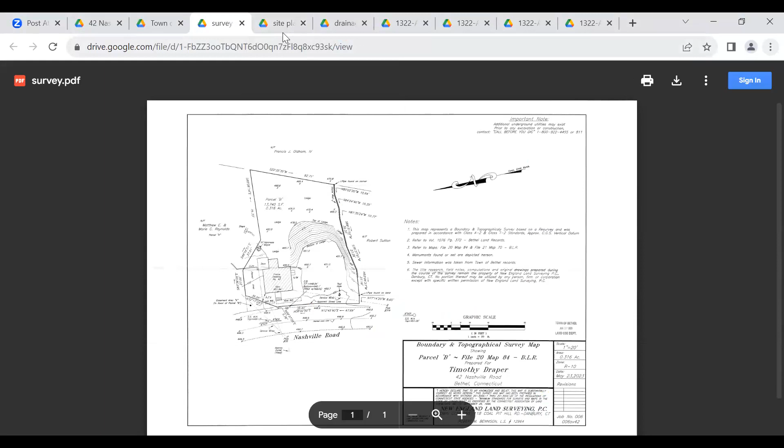Thank you, Ken. Because of the small scale of the site, the plan scale is 1 inch equals 10 feet. So if you look at the plan, you'll see a garage space, the garage itself is a 9x18 space, which is your standard parking space. So you can probably visualize one space outside the garage and then the distance to the edge of Nashville Road.

Okay, so I'm up here at the board. If this is 9x18, which is a standard parking space, the distance to the traveled portion of the road, the apparent street line, is... Oh, Neil, I can help you with that if you like.

Okay, Todd, you got a better scale? I scale it up. Yeah, I think the closest, so on the north end, the closest space would be 15 feet to the rear of the space from the edge of roadway. Yeah, so there is additional space behind the parking space that's behind the garage. Nancy, does that answer your question?

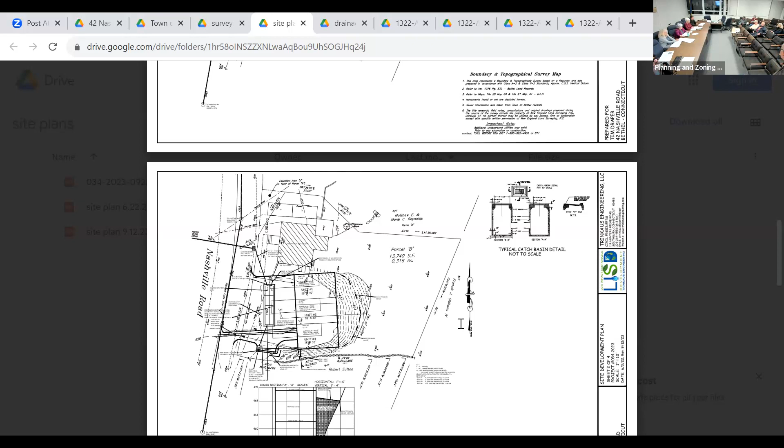Yeah, I just can't visualize it when I drive past it. It looks like a cavity in a tooth. Yeah, that's what it looks like.

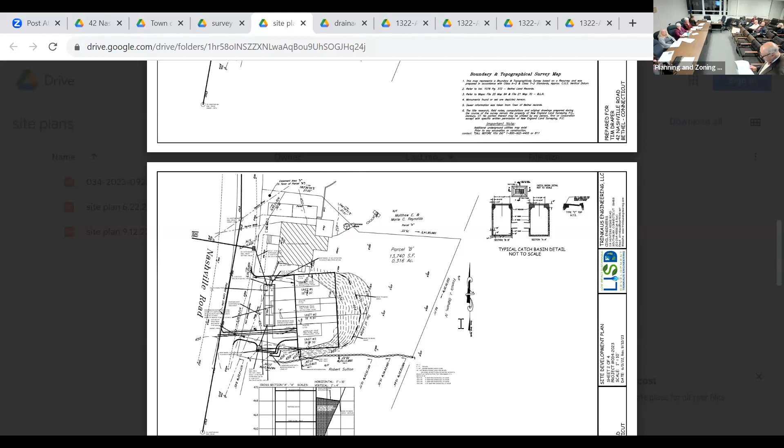Okay, thank you, Todd, I appreciate your help. But if I may just say one thing, I think the perception is off right now because the building's actually going to be pushed further back than you may be expecting it to be based on how you visualize it out there right now. I think the perception is that it's going to be closer to the road than it's actually going to be, because some more ledge will need to be removed for the actual footprint of where the building is proposed.

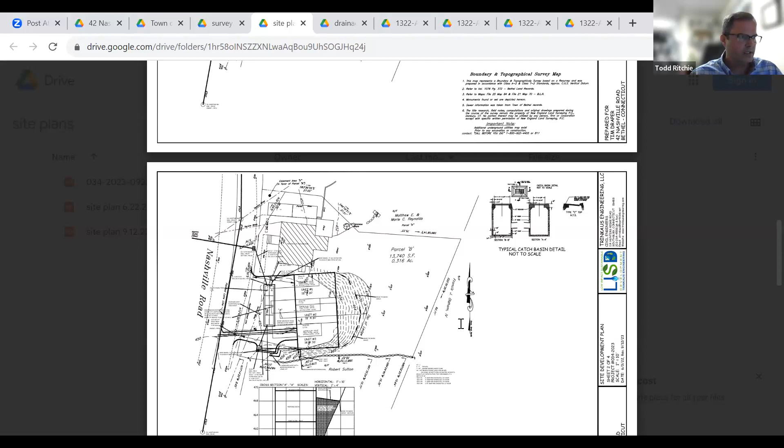So it's actually going to be, I don't have the total distance, I guess it's 15 plus the 18, the total distance from the closest point from the edge of pavement to the building. And Todd, I'm going to suggest that, following up your cue, the new construction—

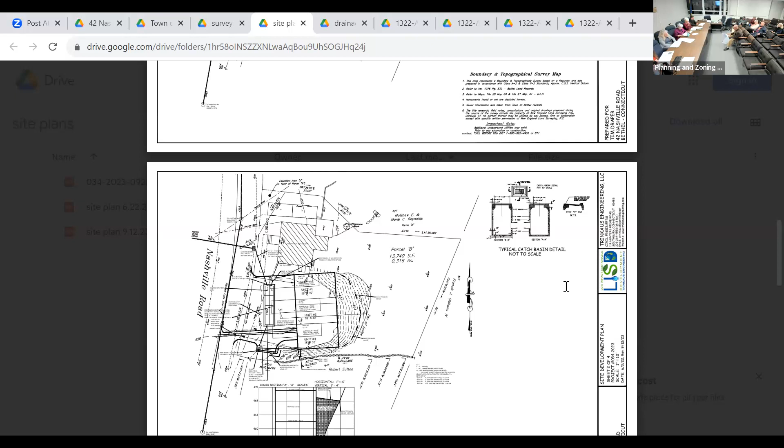The 3 units are set back from the existing house by about 10 feet. So if anybody wants to get an idea of where the new construction would be, you have to go to the existing house and pace off an area that's 10 feet back. That's where the front wall of the 3-unit building will be, and that's where the parking stall starts. You have, as I say, almost a good 25 feet from the road at that point. So there should be more than adequate.

Where it was marked, the red spots that were marked - they went out and painted two spots. One spot, which we were told is where the front of the building was. Front is the corner, right in front of the Bilco door. This drawing does not show that. This is where the red spot is. That is where the building is. There's a difference there.

The red spot is in the middle of the Bilco door. So I guess the most important thing is, Mr. Trinkaus, could you tell us how much further is this building, how much more rock is going to be removed? How many more feet is going to be removed in order to put this building where you want it? I would have to look at the plan and then I could provide the number to staff. I don't know offhand.

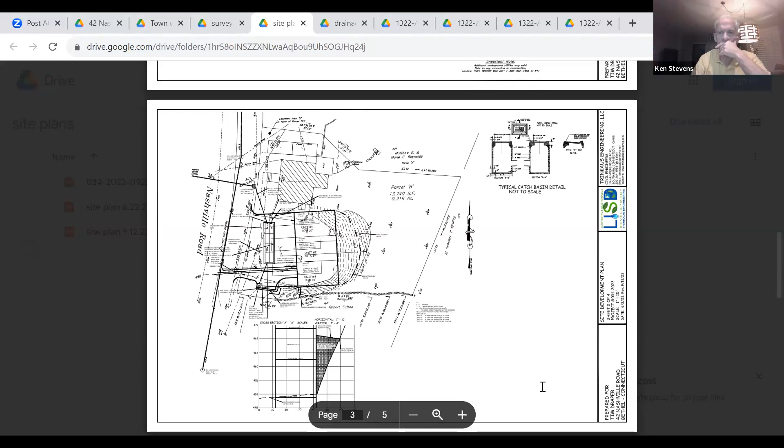Brad came back online. For the second round, we can do that. All right, never mind, fine. Mr. Coates, can you be heard now? I'm not sure, can you hear me? Yes, we can hear you now.

Name and address, please. Brad Coates, 1 Fairchild Drive. My question was: is there going to be an additional opportunity for public input after the discussion of this application at this meeting?

During the public hearing, when the public hearing is tabled or closed, whichever happens, then it'll be over for tonight. I did have some comments, but they're not germane to this particular application, so I guess I'll join you at your next meeting with those. So you have no questions about this Nashville Road project? Only I did have a question about whether the commission will be voting on this tonight, given all of the recusals.

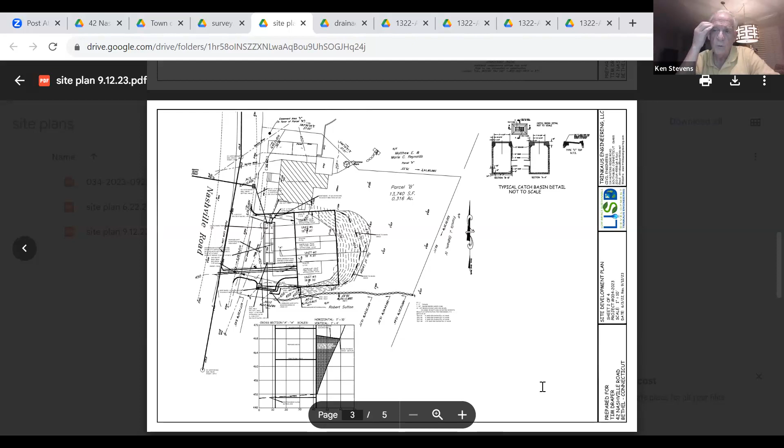Mr. Trinkaus, are you saying the building's foundation will be the retaining wall, or will there be a retaining wall between the house and the cliff? The back wall of the building will be the retaining wall. It'll be a concrete wall.

Is that just the basement garage area that'll be abutting? It'll extend up through the first floor for part of the floor area, and then what would be the third floor, since the garage is on grade, then first floor, second floor. The second floor will be walkable to the outside grade behind the building. So yes, this wall will be up.

Anywhere around 14 to 16 feet, and then it will be backfilled. But it should be designed by a structural engineer, and yes, it will be. Okay, thank you, I couldn't picture it looking at the plan.

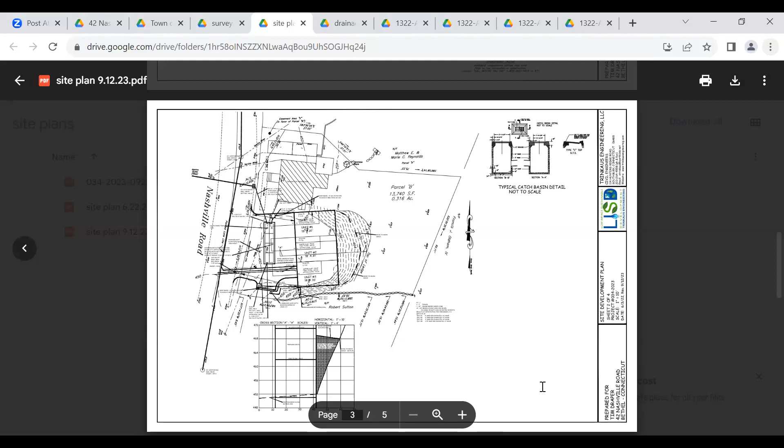Thank you for making that clear. It is 8 to 5 for excavation, and you can start at 7 for the hammering. We haven't had an excavation permit in a while, so that's why I didn't realize. Let's not even get into the semantics of it, it's very clear, the office knows the rules, and I'm just trying to give you an idea.

If someone's going to put up plywood, do electrical, bang nails, roofing, things like that, they follow the noise ordinance. If you have a piece of heavy equipment on the job, and you're hammering and removing rock or ledge, you have to follow the excavation rules. Do you agree with me? I do. All right, we're good on that issue.

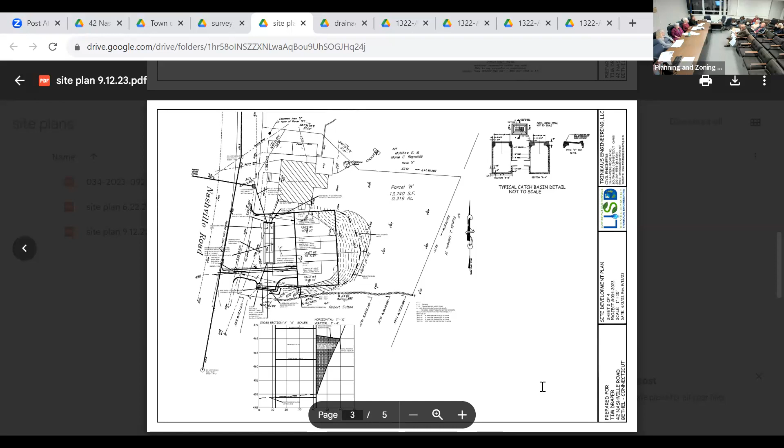About the fence where the property height differences are, in the corner next to the adjoining property owner. It doesn't have to be somebody trespassing that falls off there, it could be the owner himself walking to the edge of the property and tripping and falling off. So I think, from a safety standpoint, we ought to look at some sort of fencing there. It doesn't have to be large, but enough to show the separation of height differences.

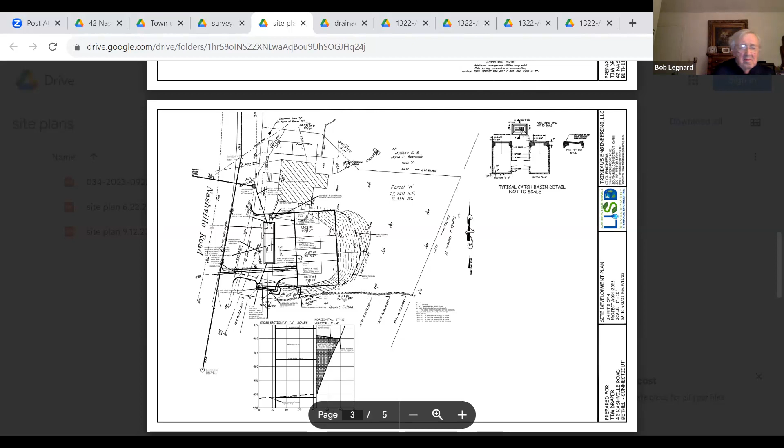Okay, Linda, did you recuse yourself? I don't.

So my question is, what is this going to look like? Because all I've seen is what's on these papers. We had that question last time. Yes, I asked it. And the answer is the building is the building that was constructed on Good Hill, he's told us.

I just- so actually, if you take a ride up there, the building will be slightly modified because it's a slightly different shape. But the material and the basic facade will reflect what's up on Good Hill.

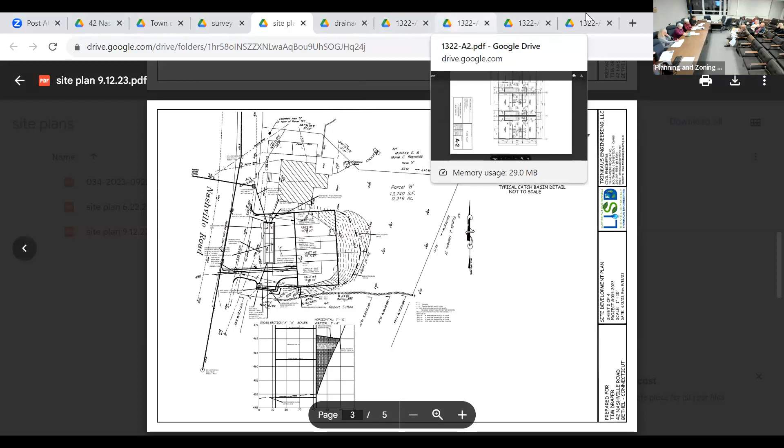And add a garage to the first floor, correct? Yeah, because I did that, and I went back twice thinking, wait a minute, what did I miss? No, they said garage, and so I thought I'd go to the back to see if there was a garage. Not one, no. I just love visiting sites.

So basically, it's gonna look like Good Hill. Yes. Thank you. Oh, well, look at this, there you are.

So what we're seeing on the right, as we're looking at it, that's the front of the building. Hold on, fine. The front of the building, and at the bottom, on the right of the plan, that area is the garage. Correct. Okay.

Alrighty, the horizontal lines, if it were standing properly, would be the garage. Okay, thank you. And so the picture alongside, to the left of the front, is the back. There's going to be all those windows looking at a wall.

Kitty, Steve Trinkus again. The windows will be up on the uppermost level, depending on the grading, on what would be the first floor levels. Tim has discussed with Tom Galliford creating window wells for ingress, egress, fire ingress, where it would be sloped up. So there would possibly be one window on the first floor level going out.

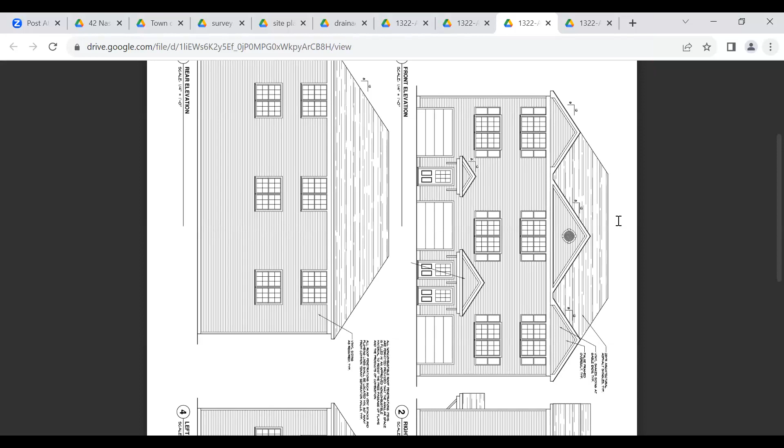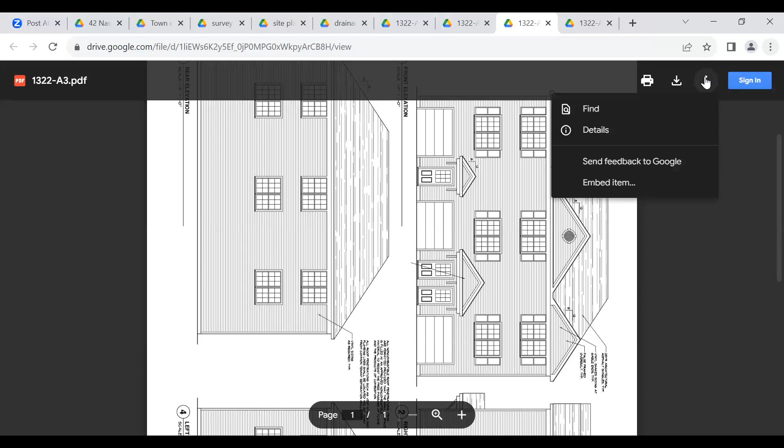Okay, but you're gonna go in one of the doors and up a flight of stairs. Right, or you're going up 2 flights of stairs to get to the upper level. Yeah. That's it for questions. Okay, Rob?

Nothing really of consequence. I'm just looking at the architecturals, and the garages are not evenly spaced where they look like they are on the site plan. Small point, but it's just stuff floating out. Otherwise, my main concern is with the rock wall and retaining wall behind. That's been addressed.

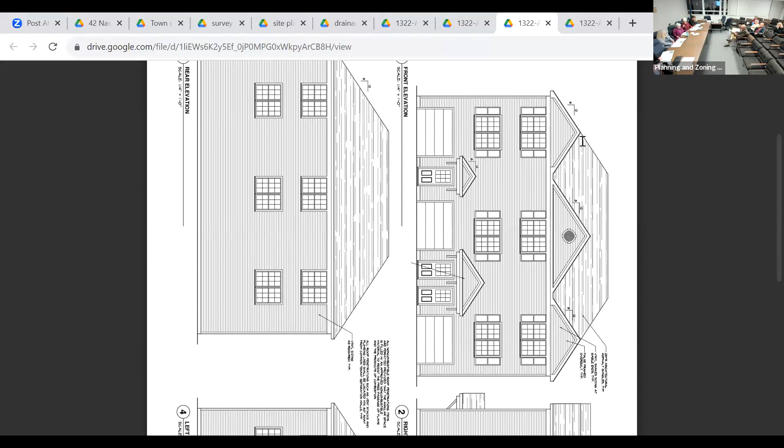Okay, my turn. Now, my first question had to do with, I believe, the Bilco door, which I think your map now makes a little bit clearer. When I went over to the site, the red marking was adjacent to the Bilco door, which meant that the people in that house could not use it. So the actual building is going to be how many feet away from the Bilco door so the Bilco door can be used?

Kitty, Steve Trinkus. I don't know the exact distance, but I will look and let staff know in an email. But it is behind the Bilco doors to maintain that access. Right, can I just ask, when you use the term Bilco, what does that mean? Oh, it's the door, I had one in my house. It's the two metal doors that open to a basement of the original house. I'm sorry. Okay, thank you. Manufactured by the Bilco company.

It's a trademark, like a dumpster, like a Frigidaire.

I have several other questions, Mr. Trinkus. I need to know how much excavation has already occurred on this site, because it looks like quite a bit, and how much more excavation, particularly to that wall behind. If you recall, we had a similar situation on Taylor Avenue, similar wall, similar construction, and we put a fence at the top of that wall and had a geotech check its stability once it was done. Depending on how much more excavation, after 1,000 cubic yards you need an excavation permit. Will that be necessary for this site? And have you arranged for a geotech to observe the wall after you're finished working on it?

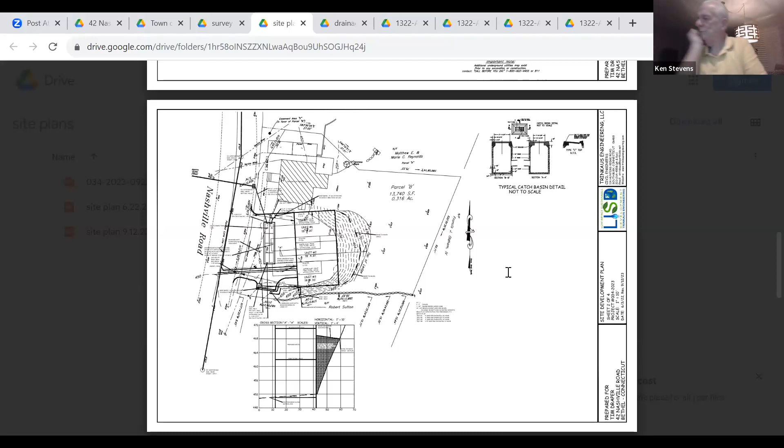Now the other part is, when I'm looking at this drawing, it shows the stairs for the fire department only going halfway back, because on the side of the building - how, at the end of the stairs, are they matching the existing grade? They're matching onto grade at that point where they can walk on the ground.

So you're telling me there's going to be a grade that goes from there all the way around the back of the building? Correct, yep. And you'll be able to show us this more clearly, because this map doesn't show me this. There's a cross section on the plan, but I'll put spot elevations there to make it clear what the grade will be behind the building.

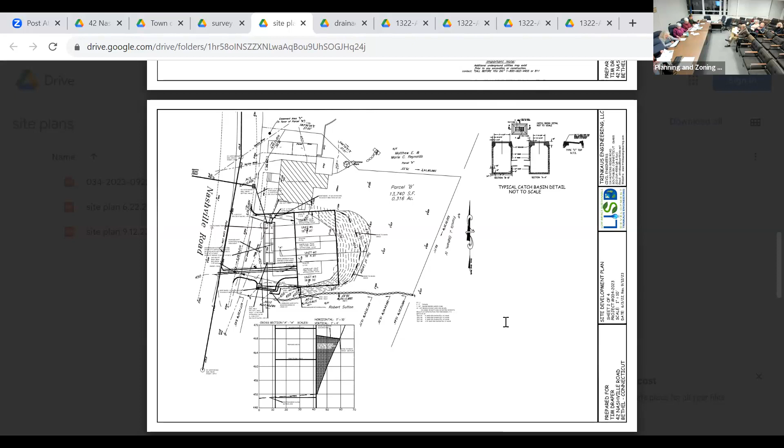I'd appreciate that very much, because looking at this, I see a flight of stairs going halfway up one side of the building, and I don't see anything else going to the end or back. You'd need something on the other side too, since there's a lot of wall on that side, isn't there? But you just need fire access from one side. Okay, all right, so it's complete - and of course we haven't heard from the fire department yet. But if you could get us that information, I'd appreciate it. Yep, we will.

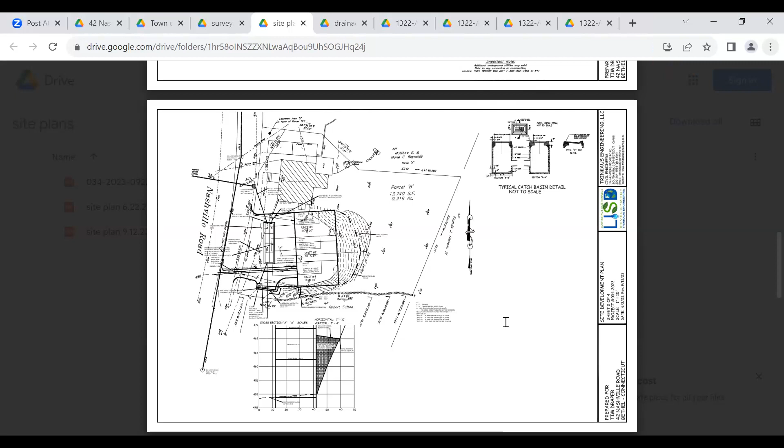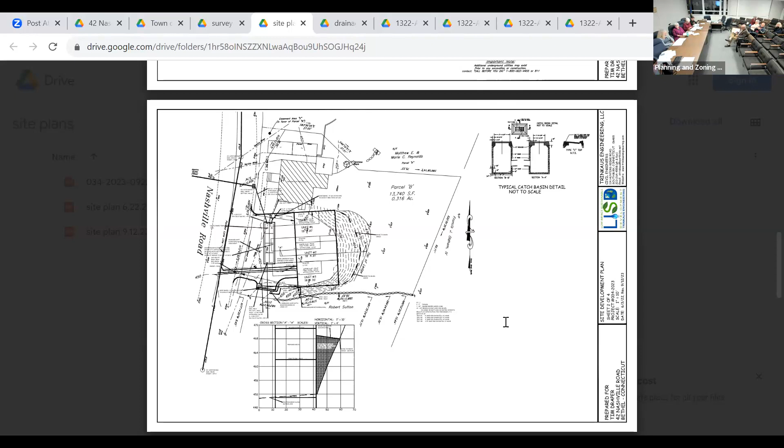Mr. Ritchie, are you there, Todd? Yes. Hi, Todd, you've been looking at this. Can you help answer some of our questions or point me in the right direction? I'm a little confused right now, or share your comments with us, please.

I certainly can. Again, for the record, my name is Todd Ritchie. I'm a registered professional civil engineer, a board certified environmental engineer, a certified floodplain manager, a registered environmental health specialist, and a registered sanitarian. I've looked at this plan on behalf of the Planning and Zoning Commission since I've been requested to review a variety of applications for the town. Since I've been back on board as a peer reviewer, I've reviewed this application in addition to 6 or 7 other applications for the town.

Consistent with standard zoning regulations as applicable, as well as health and safety issues, environmental impacts, civil engineering. And for this application, my charge wasn't restricted because of the recusals to just civil engineering, it was to anything related to the planning review process. However, I will not review anything that's outside of my scope of knowledge or experience.

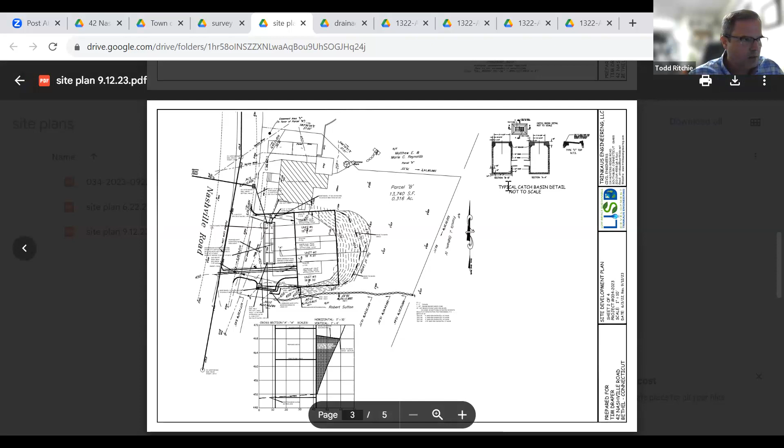My comments, I believe so far, have been relevant also for referrals to other departments for their comment and review as necessary, which apparently is either in the process of or they've addressed my referral comments. So I have worked back and forth with Mr. Trinkus on several review letters and response letters. Have made progress certainly with his responses and modifications to the plan according to some of our comments.

I can kind of walk through, I think it may be helpful for me to walk through and help people understand the plan. Because even though it is a small site, it is kind of complicated from the topographic standpoint. And some of the questions that were asked, I could probably clarify for you, Madam Chair, as you mentioned, for distances and such.

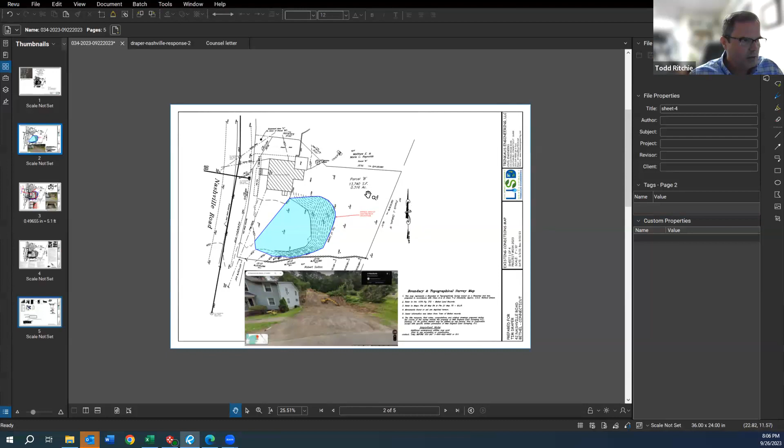So if I may, I will share my screen. I do have a slide kind of marked up to help everybody understand and guide you through answers to questions, just confirm that you can see this and we'll be all set. Can you see my screen? Again, these are just kind of working markups, overlays to help people visualize and understand Mr. Trinkus's design plans, the site plans. This is the existing conditions plan.

As noted, this is the area of the existing ledge removal, approximately, that everybody can kind of see. This is a Google Street View of that area as excavated. So you could drive by there today and see essentially the same thing without the machine in view. So that is what the existing conditions are at the site right now.

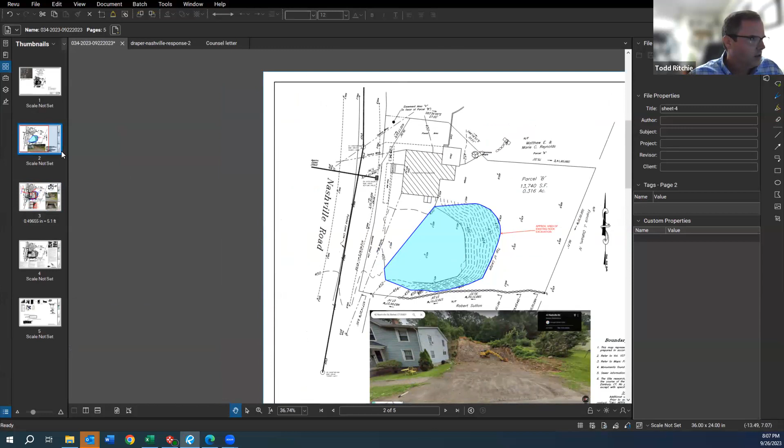And that's essentially, if I go back, this area right here that in, I guess, town GIS photographs going back to like 2016, this area was created for parking on this side of the house, the existing house. So the proposed driveway will line up with that proposed building on this side of the house. And as Mr. Trinkus mentioned, it will be approximately 5 feet from the corner.

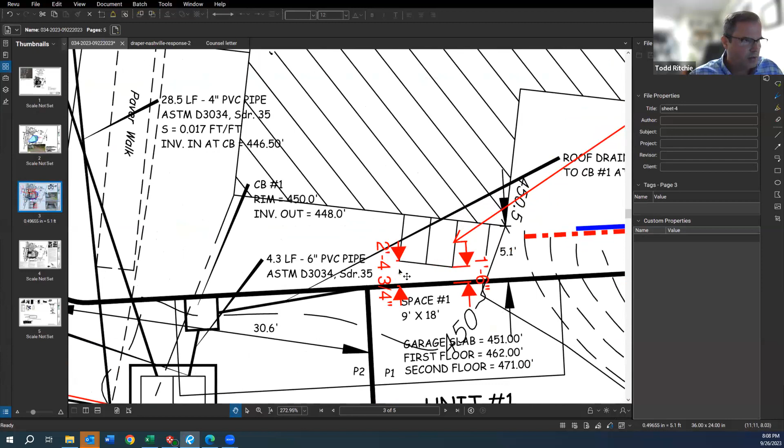I guess it's the southeast corner of, let me just make sure my bearings are right. I probably covered up but usually north is up. So southeast corner of the existing house. And this is that hatch or Bilco access to the basement that you're asking about or interested in. Based on my measurements, it's about 1 foot from one corner to the proposed foundation, and roughly 2.5 feet or so to the other corner from that hatch.

And this is just scaling off the plans. As Mr. Trinkus mentioned, and as you can see here, the footprint of the proposed building will need to be, it's rectangular, and it will need to be set into, and more rock will need to be excavated from that already excavated rock area in order to build the foundation of the building. It's not as much as what was removed already. If I had to guess, it'd probably be a quarter of what was removed already, perhaps, or less, because it's just in basically the northeast and the southeast corners of the building.

It looks like there'll be somewhat of an offset likely required to build that foundation wall with the formwork. And I estimated it with this red line right here to show that it's probably maybe like 4 feet off of that foundation wall that will be over excavated rock, so that there's space in there to actually set up forms and any bracing or anything else, because that's a pretty high wall that has to be constructed for the back of the building. So I'm sure there's going to just be an over excavated rock area for that to happen. So that's this red line right here.

So I've labeled that as the 4 foot mark. That lines up with the now proposed steps on the south side, and those steps will certainly provide that foot access to the back of the building, with those achieving that grade transition.

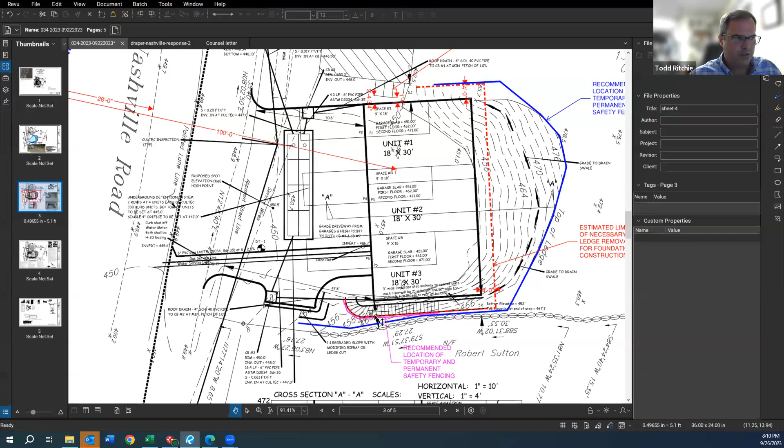To that new staircase, which would probably just be a railing on top of the edge of the steps or something of that nature, which is this purple line right here. So I think that can be relatively easily achieved to address the concerns about fall protection from this direction.

Certainly, I agree there could be issues relative to trespassing, but there could also be issues relative to curious kids or people who might want to wander around the applicant's property at any given time that need to be addressed too. That just needs a closer look maybe when the time comes, as a condition of approval, whatever that may be.

We did this just to give you an idea of the cross section that Mr. Trinkus was referencing through the building. This shows that here - this is that 1-to-1 rock face that will be achieved, but I've modified it to show that there's probably going to be a 4 foot offset.

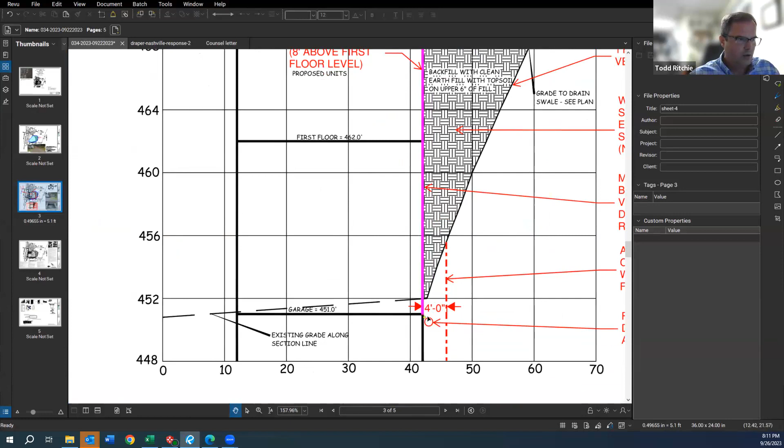So there would be some vertical or steeper rock area here to get that foundation in. And then this purple line right here is the required retaining wall section, which is actually going to be holding back the earth backfill based on this section.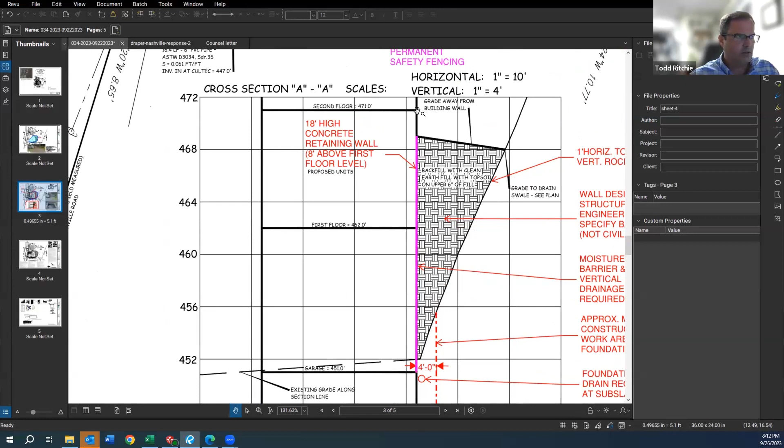That's about 18 feet high of soil retention wall. It's all one wall - I don't know where it will actually end, probably at the second floor level or somewhere around there. But that's something that will need to be designed, as mentioned, by a structural engineer, which is a requirement and standard practice.

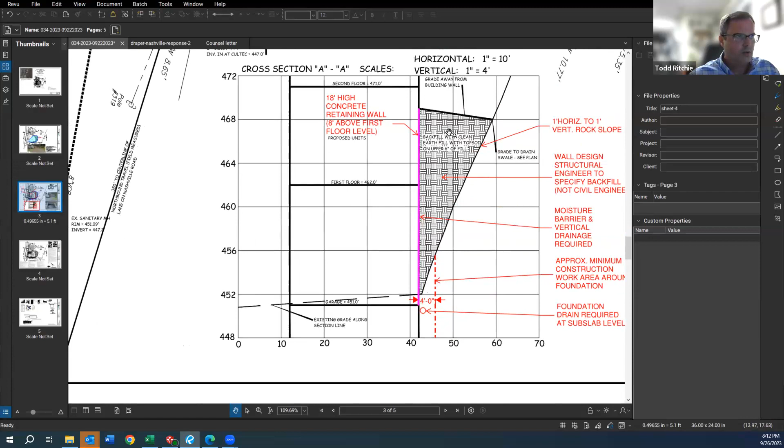At the bottom of the wall you have a foundation drain, and maybe a drainage board along the wall for any water that infiltrates through the soil backfill. But also there's going to be water flowing out of the ledge or along the ledge and into the soil, and infiltration through the soil. So ultimately there needs to be some sort of drainage for that foundation.

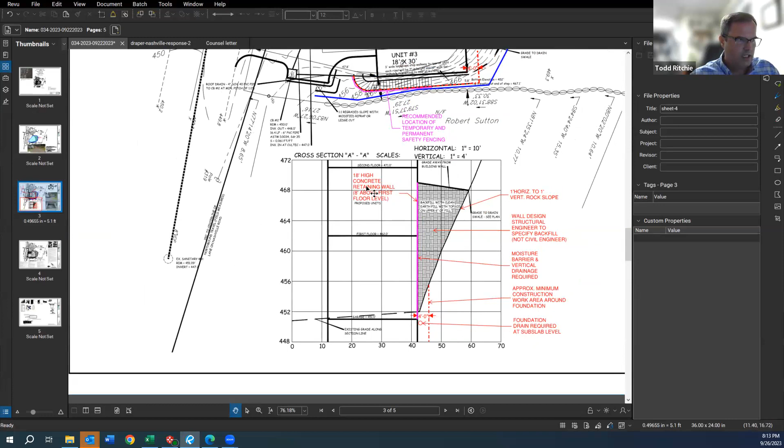That's something that can be addressed through the approval process. Having footing drain connections - my comment on this is it gets worked out through the building department process, but we certainly need to know where the foundation drains would be going so they're not dumping out on the driveway or somewhere that could cause an icing hazard.

A couple other comments just explaining the site. We talked about the parking spaces, which are right here, these rectangles. As you can see, there's space between the edge of pavement or edge of street line and those spaces, so they're not right up against the street line.

There was a question about the connection of the outlet from the underground stormwater system to the existing town catch basin. Mr. Trinkus said it was filled up and not visible or accessible. The town wasn't going to go out there and figure it out, and Mr. Trinkus is away, so I took a ride out there to take a look, wanting to know if that's going to work and making sure the pipe isn't going to be below the outlet pipe.

So I was able to access that drain, and it is visible. The pipe is down in this photo here that I took. I took the cover off, and here's the pipe - it's a ductile iron, 15-inch ductile iron pipe.

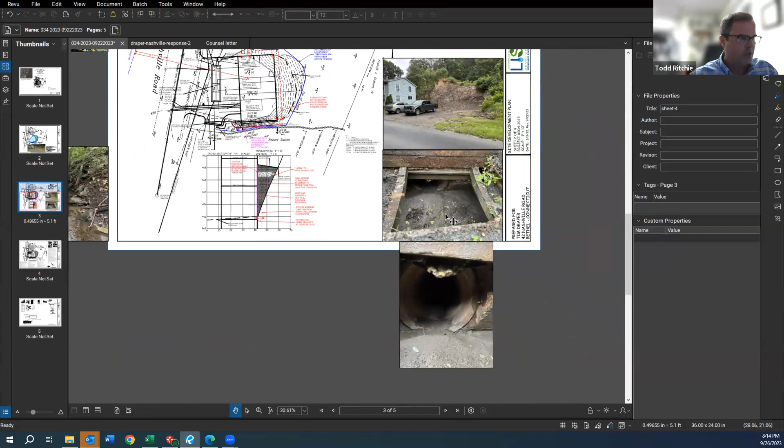So it is there, it's not blocked. It just has sediment in the catch basin just below the pipe. That, and then I did also find the outlet that wasn't shown on the survey, which is right along what appears to be a water course.

So the other question I had was just to make sure, as far as process goes, that water course appears to be like 28 feet from the edge of pavement. So it looks like if regulations apply to inland wetlands and water courses, this project may be under that regulatory authority. But that's a deferral I'll have to make to town staff or the commission to determine whether that applies in this case.

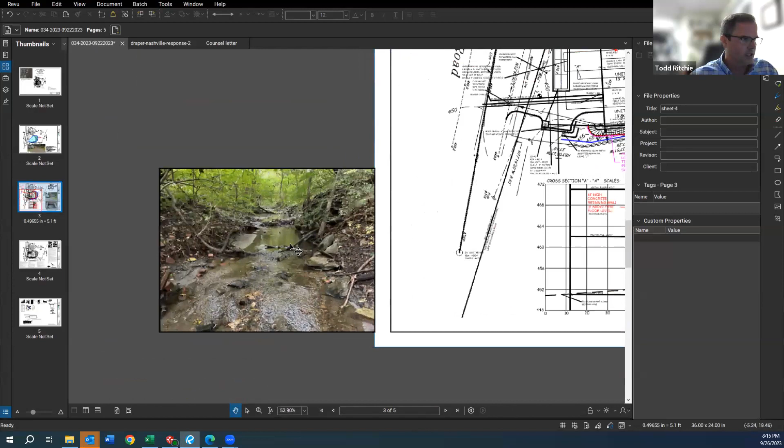So that is something I found just by tracing out that pipe. I didn't know if that was a drainage ditch, but this is the photo of the water course on the other side of the road, which is right off the edge of the road.

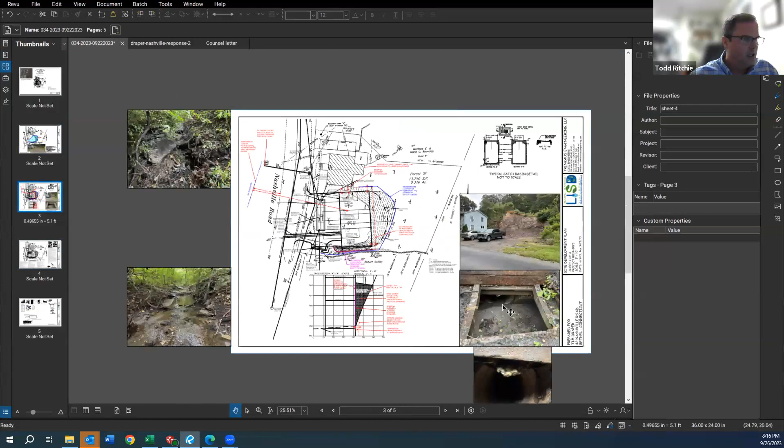So all in all, I think lastly was the existing building or structure we were talking about, which is... great, actually I think it might have, sorry. Right here, sorry, I could use this one. This is the existing house.

It's stated as 2 units in the building. The town records currently have this as having 1 unit according to the assessor's record. So the applicant hasn't submitted any floor plans showing how this has been either already compliant with having 2 separate units or proposed to be compliant with having 2 separate units.

So those are the comments that I have based on just running through the site plan. But I'll just wrap up by saying there's a couple of outstanding comments that we suggest be addressed.

One is that we suggested there be yard drains where this swale is proposed in the back here, partly because this swale with these arrows is directing it into basically the area of the proposed building and also the existing building, which would be any runoff that would be in that direction.

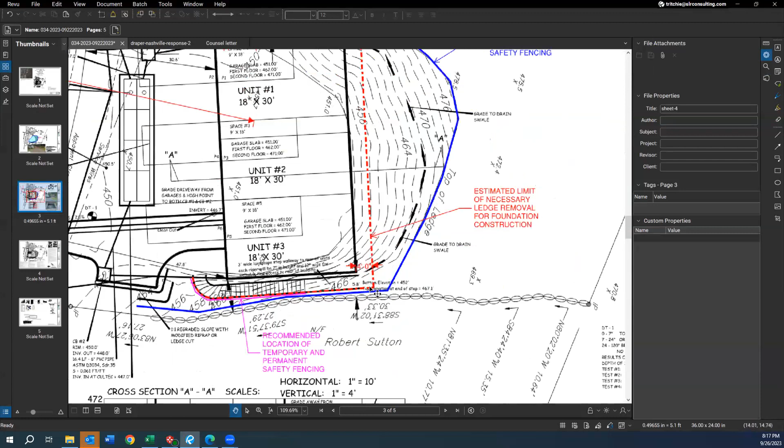And then to the south, particularly with the staircase, the swale would direct it to the staircase and water would run down the staircase. So we think that's a simple thing to address. I think Mr. Trinkus could consider that.

The safety fence, as we mentioned, during construction, the blue line all the way around, because this is an area that certainly is steep. This area will not be as much, not for us to make a determination, but perhaps after construction, this area directly behind the building isn't going to be a potential hazard. More so, it's just along the steps that go down on the south side.

The access to the basement, I guess the question is whether there's enough space adequate for access to the existing basement within the existing unit. I would defer that to the building official or someone to make that determination, but it does limit the space that is there based on these dimensions that I had mentioned.

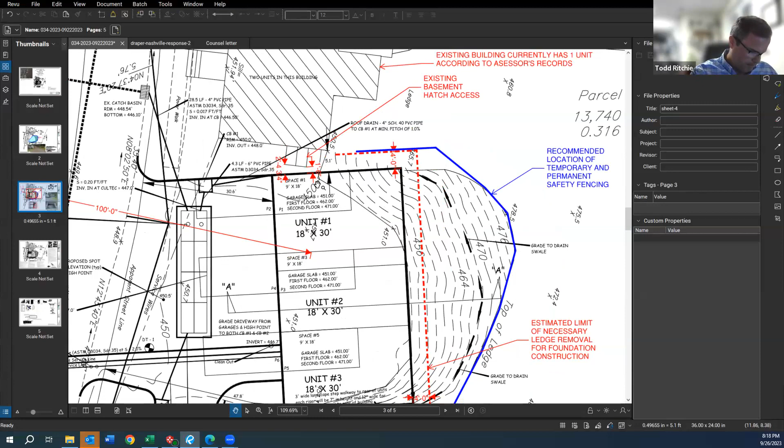It sounds like Mr. Trinkus is going to add some more spot grades to clarify the grades around the south of the building. We ask that he also do that along the back side and the north side of the building, so that there's an understanding of what the final grades will be around the perimeter of the building. I think that would help also for somebody reviewing the plans and consistency during construction that the grades are being achieved.

As I mentioned, the foundation drainage discharge location, providing that. We mentioned having the catch basins have a hooded outlet so that it can trap any floating debris, like organics, oils and greases and things like that. It's something that certainly can provide pretreatment prior to going into a system that's entirely based on infiltration, especially for the smaller storms and the water quality storm. So I think that's a pretty simple thing to ask for too.

So in conclusion, in addition to those comments that we had, I could certainly reiterate or summarize outside of my notes that I had prepared just before the meeting.

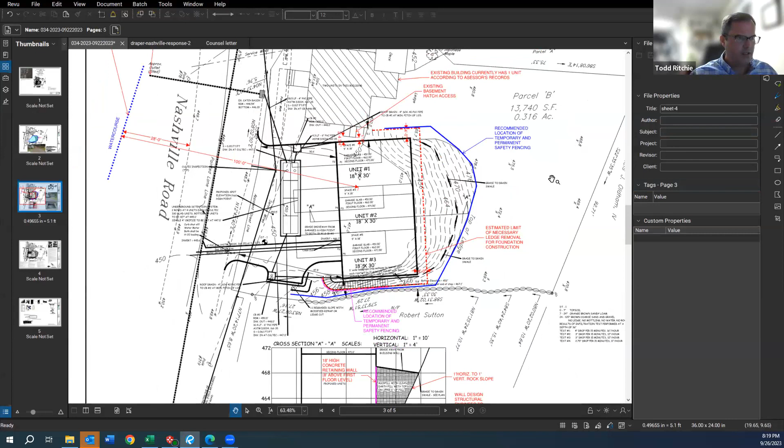We also just note some administrative items. The revised engineering plans, we haven't seen copies that have the signed and sealed copy, so whether that be originals the town requires, I'm sure they can be provided. Also, the survey plan that was submitted so far doesn't have a sign and seal from the surveyor either. For the record, that should also be provided.

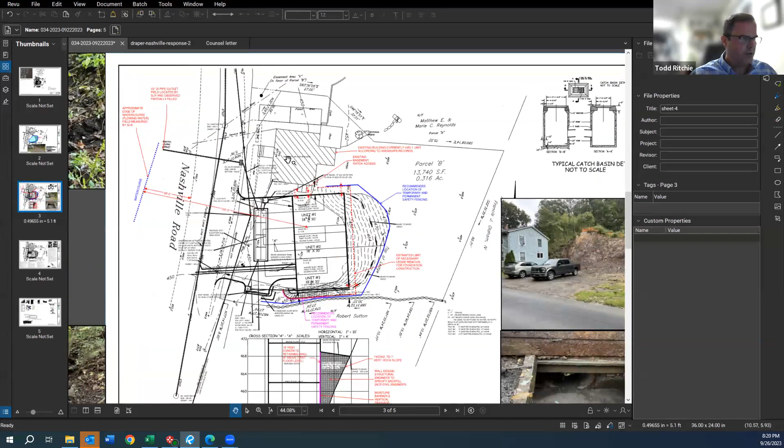And then floor plans for the existing house to have 2 units, and also just a determination by whatever authority can make the determination whether or not the water course across the street is applicable to this application. And that's all I have.

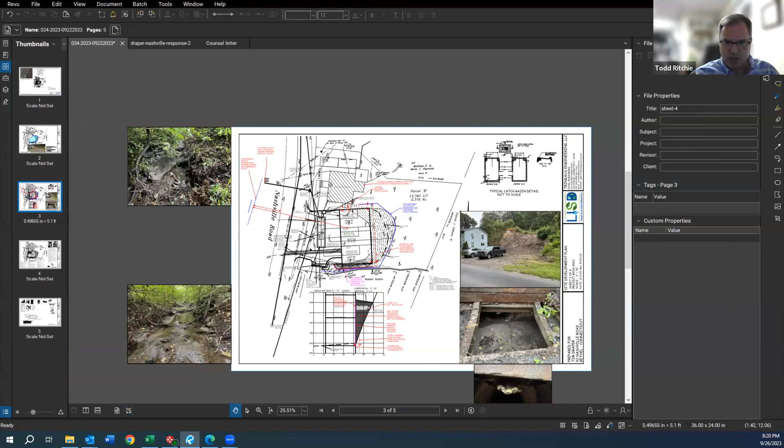Kitty, Steve Trinkus, if I could just ask Todd, could you provide PDFs of your marked up colored plans so I get a better sense of what you marked up? I think I understood listening to you, but looking at a plan would be more helpful. Yes, definitely, I'll forward the file along. Okay, great, thank you. That's wonderful, thank you.

Wow. Okay, so, Commissioner, everybody set for now? Yeah, we do have quite a few questions that will be coming forward, Mr. Trinkus.

That door to me is huge, and I say it because I have one. If I go to the back and open it up carrying something to go into the basement and I have one foot, I'm in trouble. And in a lot of cases, that's the only access to a basement. You have to keep in mind that the same person building the new house owns the two Bilco doors, and I'm still giving thought to how he's got to get in there, because he needs access to his own basement. But I'll figure it out.

It's a good question, yeah, I believe so. And there's another thing about this plan, I've gone over it a million times. These are 2-bedroom apartments, so there's going to be children. And there's no place for a child to even sit outside. There's going to be rocks. It's not a child-friendly site.

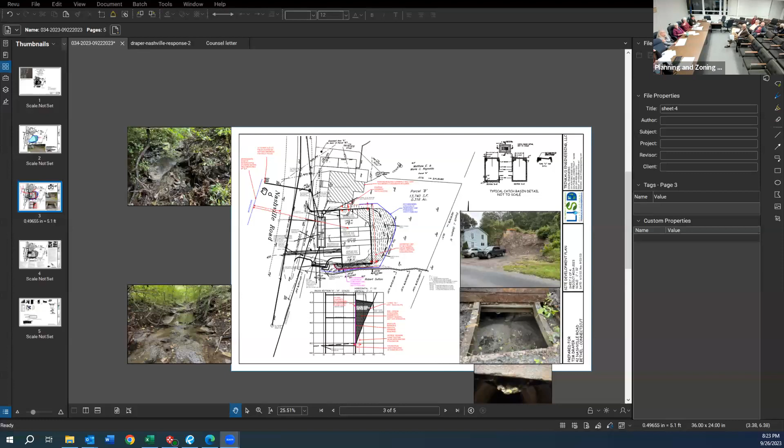The cross section on the plan does show the proposed grading against the back of the unit, and we will be providing spot elevations which will give the commission a better feel for what the grade will be behind the wall. I can see the grade, but I just want to know where the concrete is going to be put up, how far, and what will be exposed. We'll call that out on the plan. I would appreciate that.

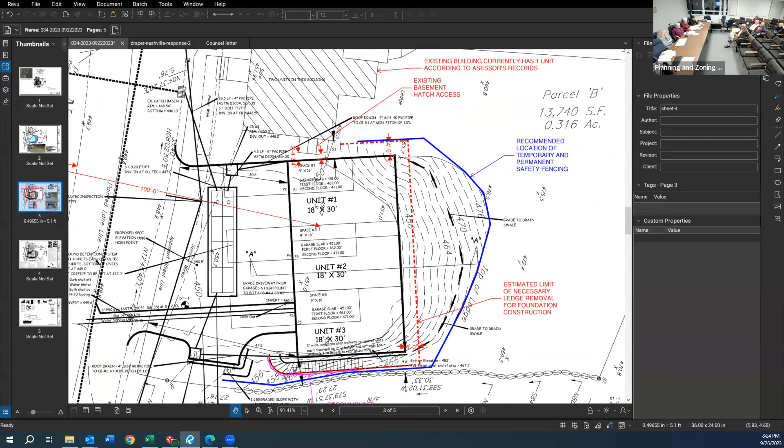Okay, so obviously this meeting is going to be tabled, continued to our next meeting on October 12th. That was the 12th.

Before we do that, did I hear correctly that the existing house lists that there are 2 units in that building? Yes, 2 apartments now. However, that's not what the town information is? No. Todd, did I hear you correctly? Yes, you did. I think there will be 2 units. No, there are, there are right now. It says it's a 2-family today.

I have a question, I question that. So was the proper paperwork taken out for it to be a 2-family building? My understanding, and I'll confirm that for your next meeting, is when the property was purchased by Tim Draper, it was a 2-family. So I'll figure out why that has existed, if there's any question. My understanding is it's been a 2-family for a long time, not recently, but I'll find out, I'm sure it has to be in the record somewhere. Well, yeah, we're looking for that. Okay.

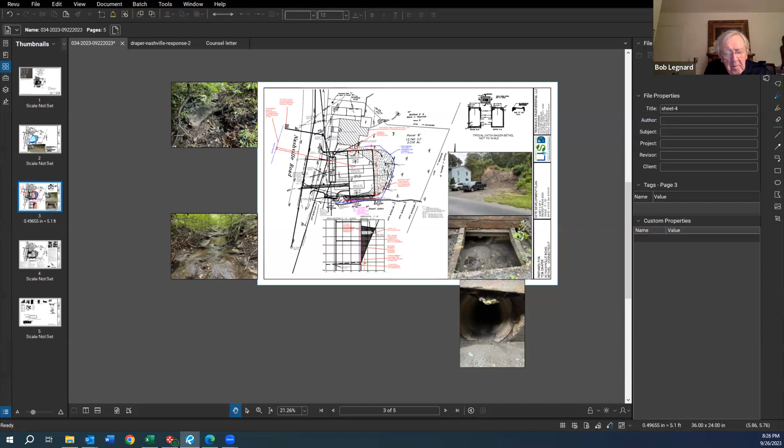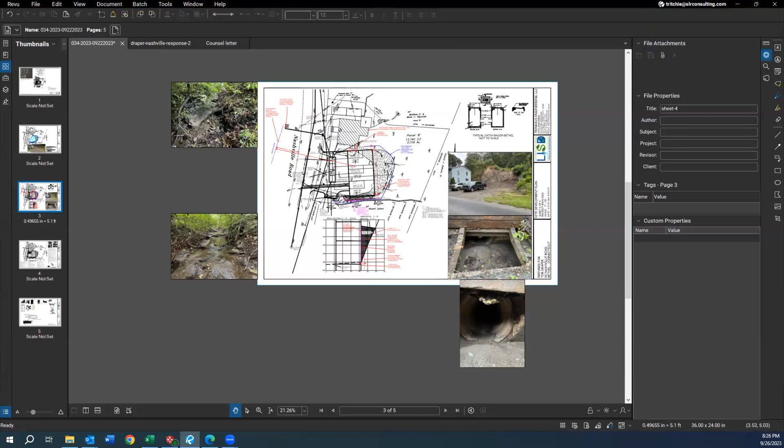The town field card doesn't tell me how many bathrooms and how many kitchens this has. It has 3 bedrooms, but it doesn't tell me how many kitchens. We'll find out, we'll find out. Okay, thank you, I can't tell you that here.

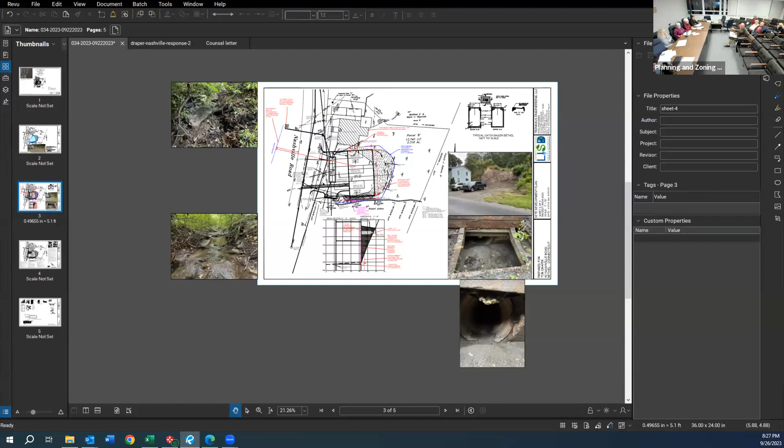Thank you, Bob. The design of the back wall of the new 3-unit building was the design that my architect, who happened to be relatively qualified out of the Yale School of Architecture, designed for the house that I currently live in, which I built 43 years ago. It is large - the Nazaro brothers came in and blasted the hill, and I have a rock behind it, built a retaining wall. The foundation drains that we put in around so that the water that comes down between the rock and the fill actually works the basement when it's wet.

So the wall that you're looking at there, I'm looking at it now in more detail because Todd was focusing on the side, the cut-through of it. And that's the type of wall that I put in. The only difference is mine was not designed by a structural engineer.

And you're lucky it works. And the house is still there. I'm gonna go home tonight and wonder when it's gonna fall down. But that is not an uncommon type of structure, and quite honestly, it works very well.

Again, just to understand, I built a passive solar house with a southern exposure. The first floor is underground - the first floor of my house is concrete to the back wall.